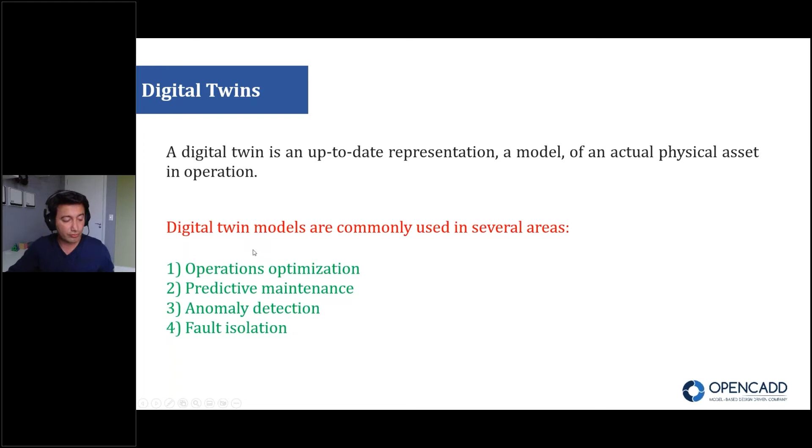First of all, I want to talk about digital twins. What is a digital twin? Actually, a digital twin is a model that represents the real system. We have a real system that is already working, and now this digital twin is a model that we created. But why should we do that? There are advantages to this.

Now we can focus on this presentation. It has 4 reasons, as you can see here. In the case of optimization, if we want to make any change in our system that is already working, it's too expensive to do any change directly. So we can have a model that we test, and if it really works, then we can implement it on the real system.

Another thing is predictive maintenance. It's a good option for us to have a productive instrument, and also to schedule a time for maintenance to have high performance devices.

And also another thing is anomaly detection. We know the real behavior of the system. If there is a deviation from the expected behavior, then we can realize it, and it can help us to change and have a quick action for that, since we know the expected behavior inside the system model. And at the end, fault isolation: if any fault occurs in our system, then we can quickly isolate it so as not to disturb other parts of the system.

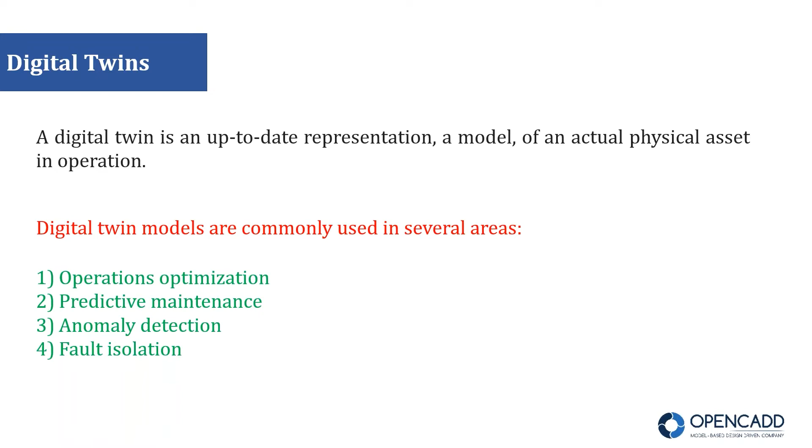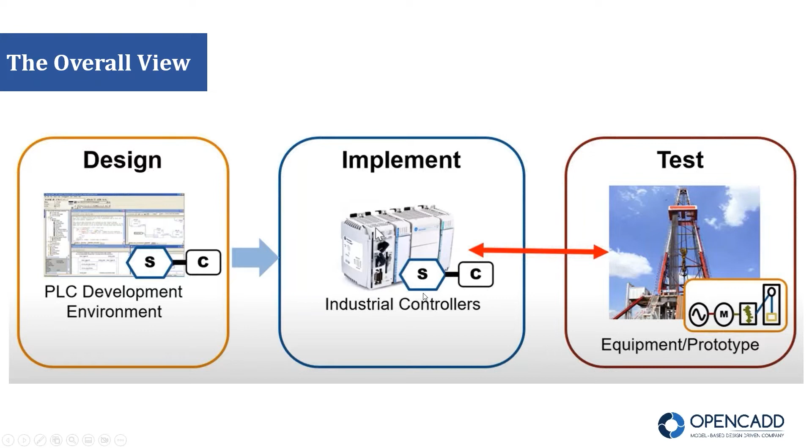Okay, now we know the importance of digital twin and modeling, so we are trying to create a model. I'll just show you how we can do it. We start with design. We create our design, and then we have this industrial controller. We can download it on this controller and see. And at the end, if everything is okay, then we implement it on the real system.

When we create our design, we can generate the C code, and then use a real-time instrument like Speedgoat, or we can generate the PLC code and download it onto our PLC. And at the end, if everything is okay, then we can implement it in the real system.

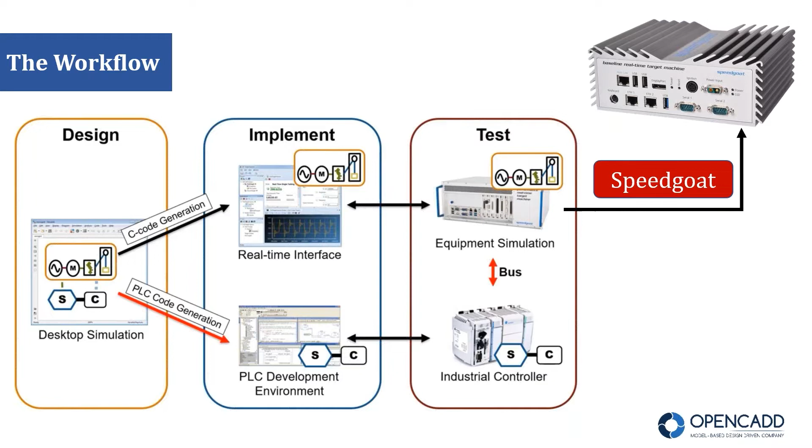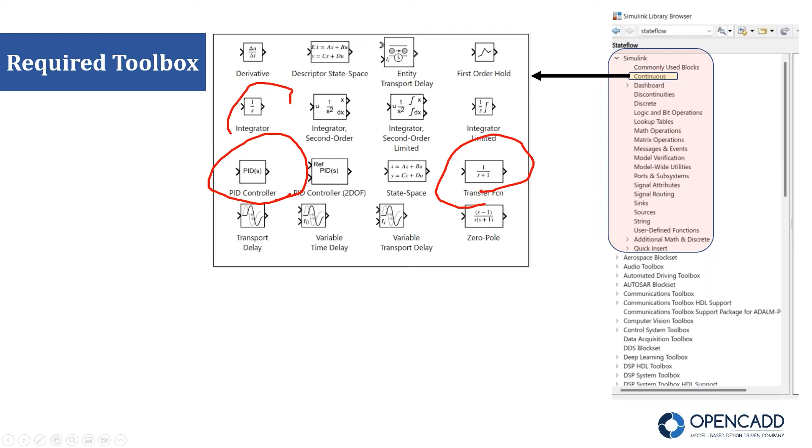For example, if you need the PID controller, we can find it here. The transfer function, you can find it here. Integrator—this part is too important for us.

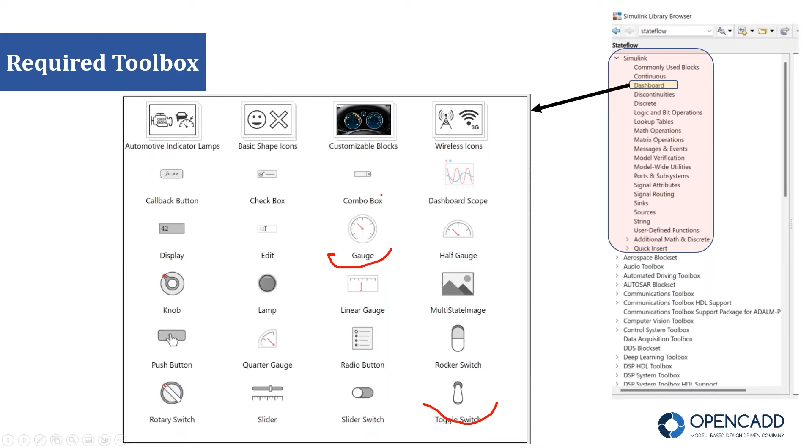And then if I want to mention, you can see the dashboard, for example the gauge or the toggle switch, some part that in this webinar I will use and show you how we can use in our model.

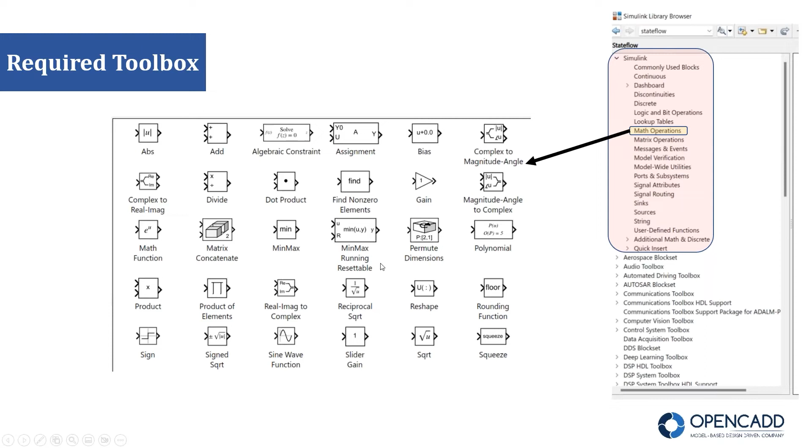And also we have a math operator. If you know about the mathematics behind your system, then you can use all of this mathematic part to create your equation also.

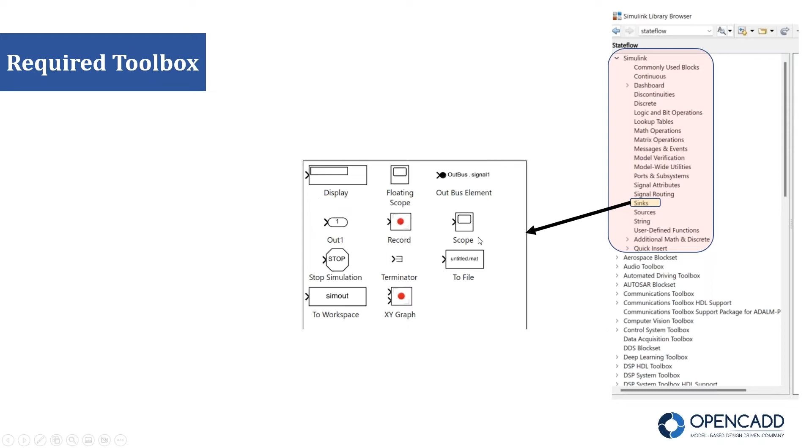And something else, for example the sink to show your result, to display as a scope. And also some sources that you can see here, for example the pulse generator that we have here, the sinus wave or other part, the clock that we normally use in our system, the ramp.

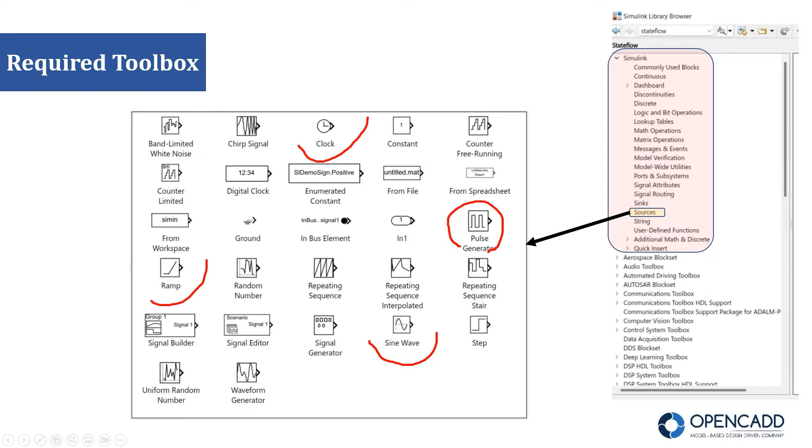So it's some basic requirements that we need.

In advanced models that we want to use, we should use Simscape. In Simscape, if you see, we have Simscape Electrical, Simscape Fluid, Multibody. So we need to know about this, and we really use this Simscape.

For example, Simscape Electrical, if you see, we have a passive model, we have some semiconductors like a diode, we have some sources, some machines that we can use, the circuit and switch, the breaker.

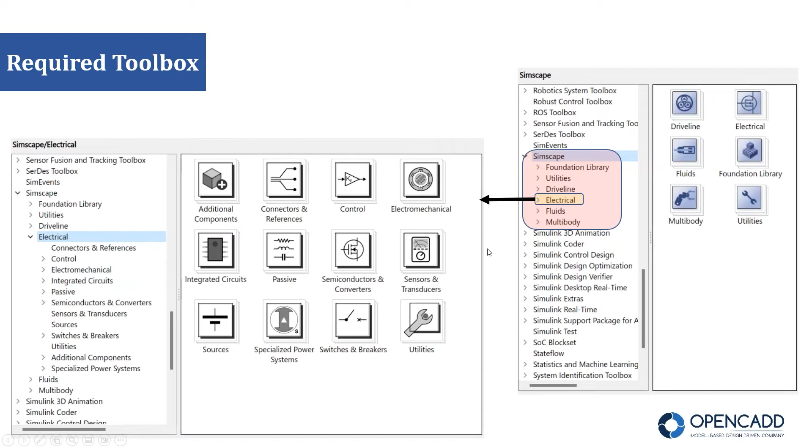And also the fluid part, that here as oil and gas we use too much in this case—gas, thermal liquid, also the actuator, valves, everything you can find here inside the fluid.

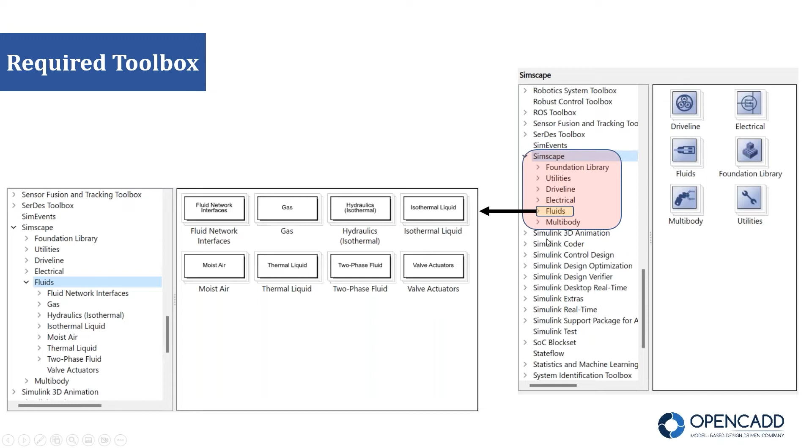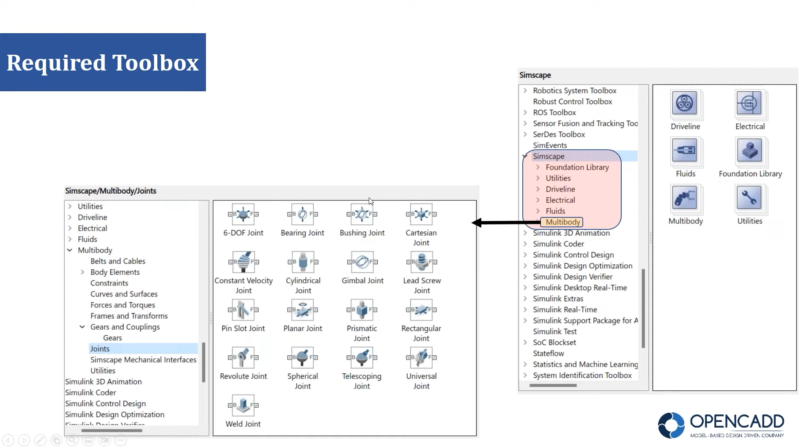And at the end, something that we use, multibody or mechanical, that you can see a lot of joints or gears or some parts that we use as a mechanical part. So that's it—it's a short review of something that we have in MATLAB.

As an example, if we open MATLAB and open Simulink, first I want to mention that MATLAB is something that you can use for something simple, for example some equation, some 2 + 2, something simple, and some sophisticated equation that we can solve with that.

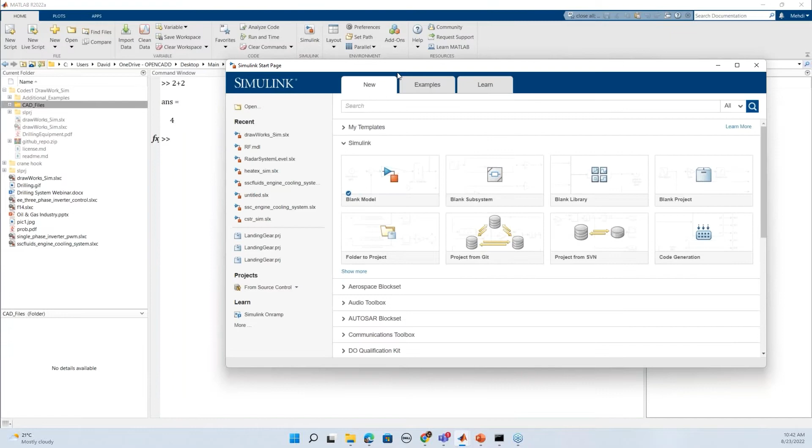Okay, if we open the Simulink, then we can see we have a blank model. Inside the blank model is nothing.

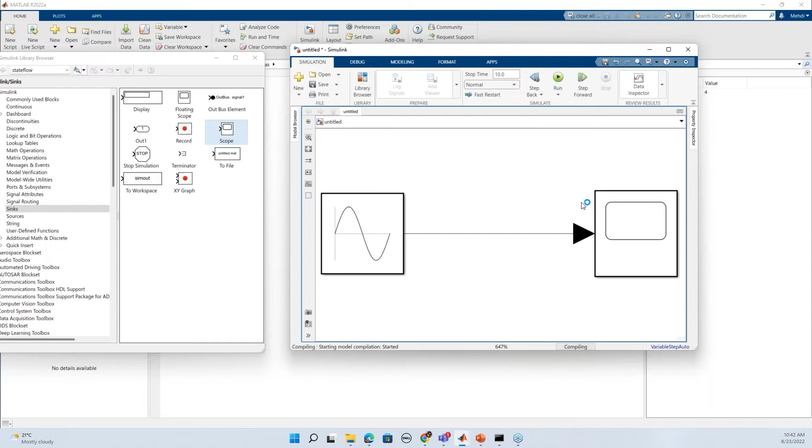You can just open the library, and then, for example, you can put one source like a sinus, and also one as a sink, as a scope, and then quickly connect to each other and easily see the result like this. Okay, and see the result easily.

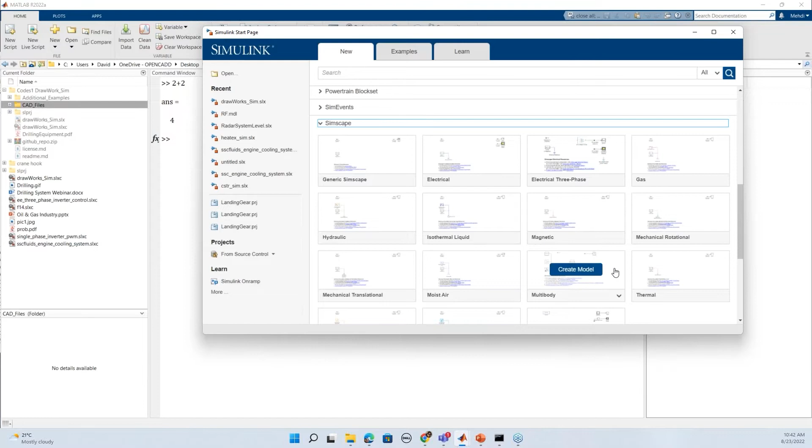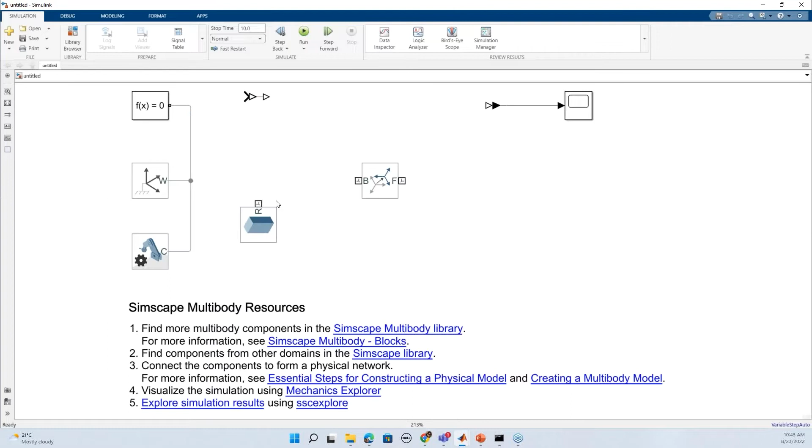You can find it. And in the advanced model, if you go to open Simulink and go to Simscape, here in Simscape you can see for each one we have one template. For example, for electrical, for multibody—if I open multibody, then you can see there is a template, the one I wrote. There is the template here, the minimum requirements that we have.

I just want to mention one simple model that helps us create the drilling part. As you see here, we have one box, and what I want is to create one model to move it up and down. Okay, so I have this box.

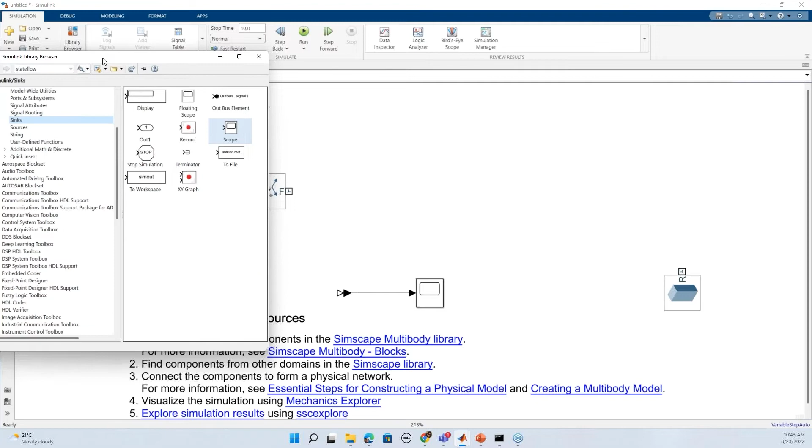Easily I can connect the parts to each other, the elements. I open the library, go to the Simscape part. If you find Simscape and Simscape Multibody, then something that I need here is one joint—a revolute joint.

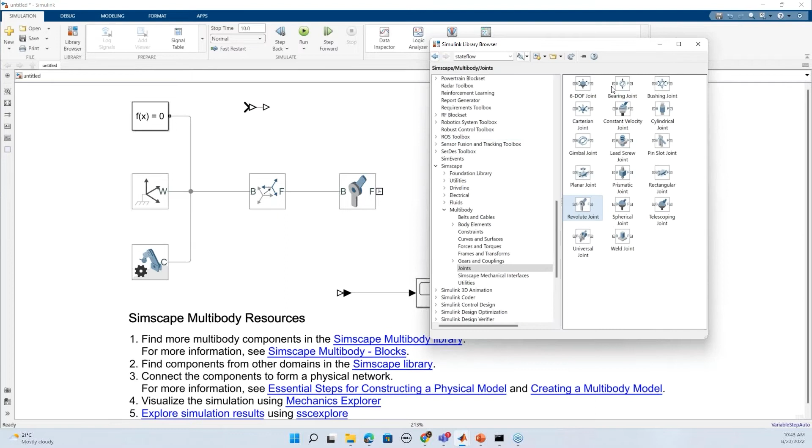I drag and drop easily here and connect to the other part, the initial part that I have, and then I select one cylindrical solid. What is this cylindrical solid? It's like a holder that I want to keep later and move up and down. Okay, so I put it here.

And then 1 meter is too much. I select 0.1 and apply, okay.

Then something that I need is belt and cable. If you see belt and cable, easily I can drag and drop this cable here, and also the end belt, and this configuration that I will put here. So easily I can connect the parts to each other.

Let me just turn it, and this one also. Okay, now everything is okay. Then just 10 is too much—I select 0.3. That's it.

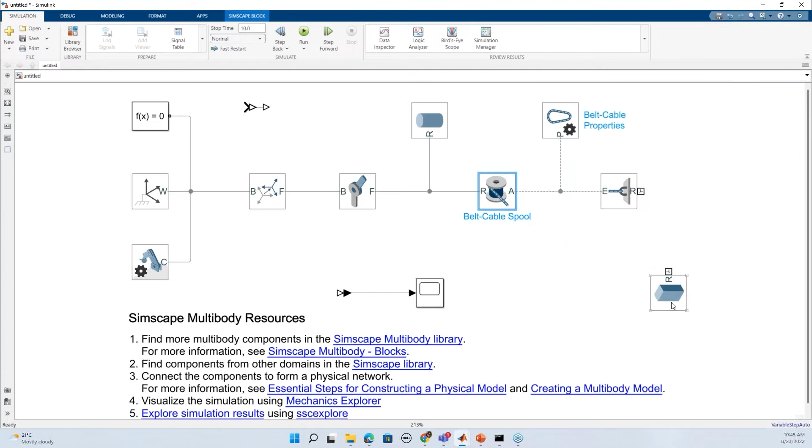Everything is okay, and I just want to run this system and see how it works. Just some requirements that we need—I put here, okay, and connect to the bed.

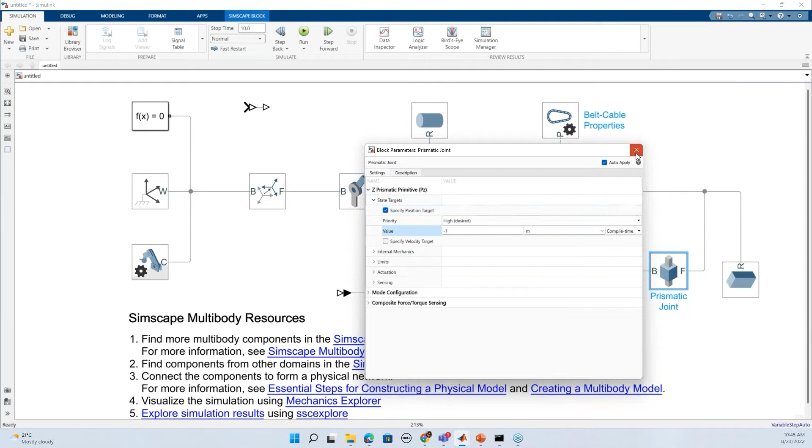And this position I put minus. Also, this axis I select the axis, standard axis, minus Y direction. It's something that I select, and everything is okay now.

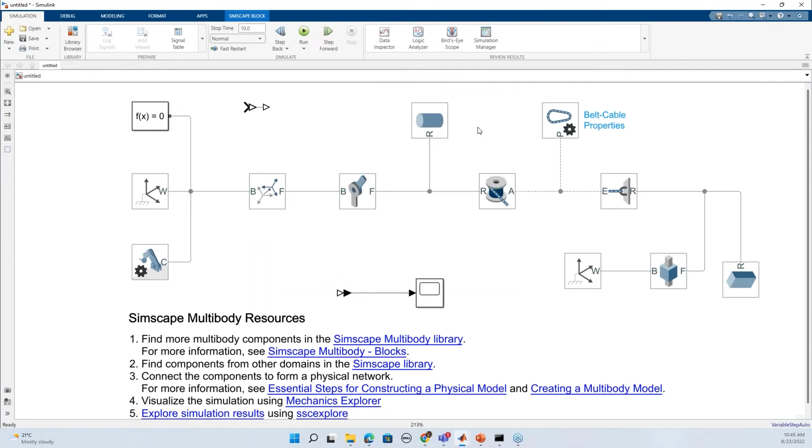Let's see, run the simple design that we create. I want to put this box up, move up and down, held by this cylindrical solid, and this cable does the actions. Let me see.

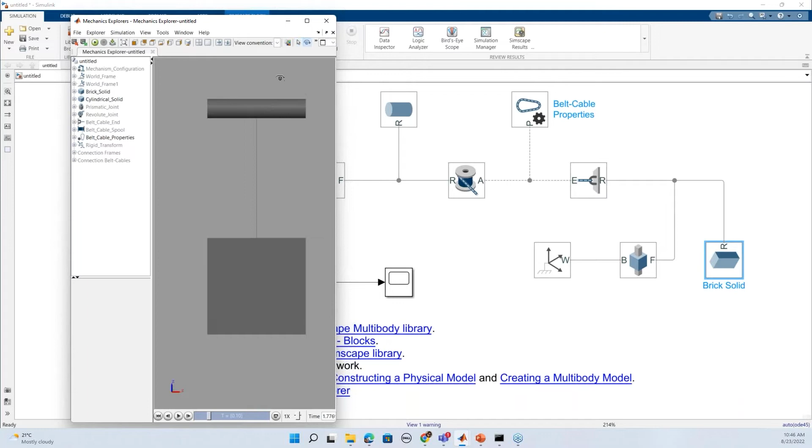Okay, before it goes down, I just zoom out and show you. If you see, we have exactly this holder that I showed you, and this box that wants to go up and down, and then just I zoom out, let it run to see all the parts.

Okay, so it's exactly the initial thing that we can use as drilling later. You can see easily we can create something that can go up and down.

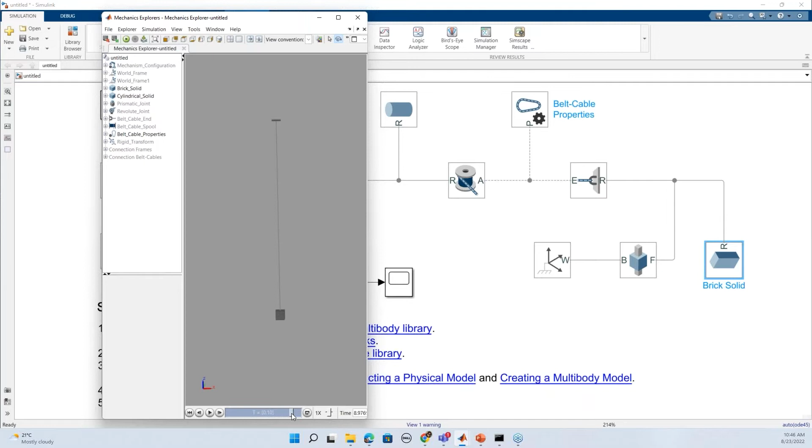It's one design model that we can use. A good option in MATLAB is that it has the ability to connect with other software.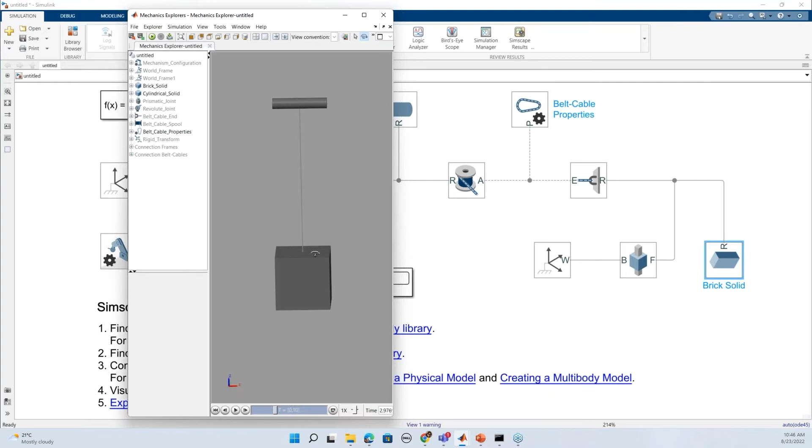For example, I create something in SolidWorks. Now I can import it here. I don't want this box, I want to create something else.

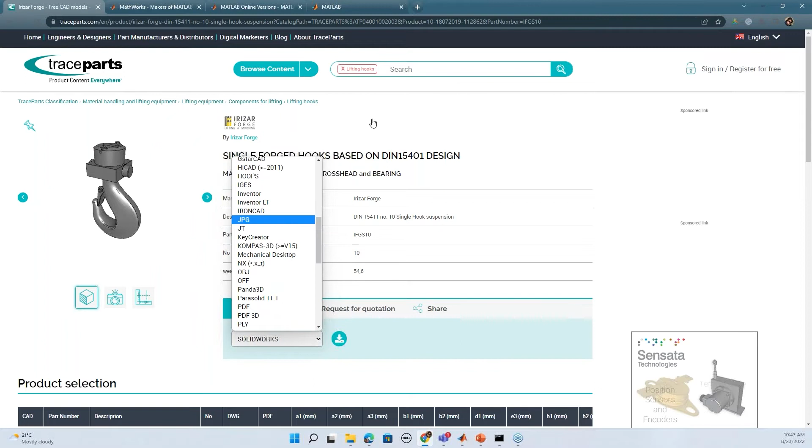I found one website where you can find models. For example, if you search crane hook and search, you can find a lot of crane hooks. I select one like this, and you can see a lot of formats available, for example CATIA, AutoCAD. I select the SolidWorks format.

You may want to create your own design. I just want to show how you can import SolidWorks and connect it with MATLAB. Easily you can download it, I downloaded it before, and I will import it here.

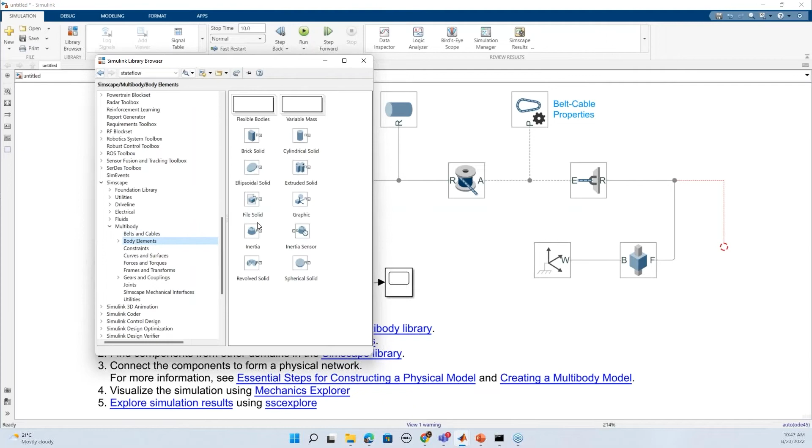If you see, I put one File Solid, and then some configuration. I select my file that I downloaded and put it here. It is exactly the model from SolidWorks that I imported in my Simulink.

Then I can give, for example, a mass like 100 kilograms to that. And in the case of direction, I should also put it because I selected -y here, I also select -y, then save it, apply, and run.

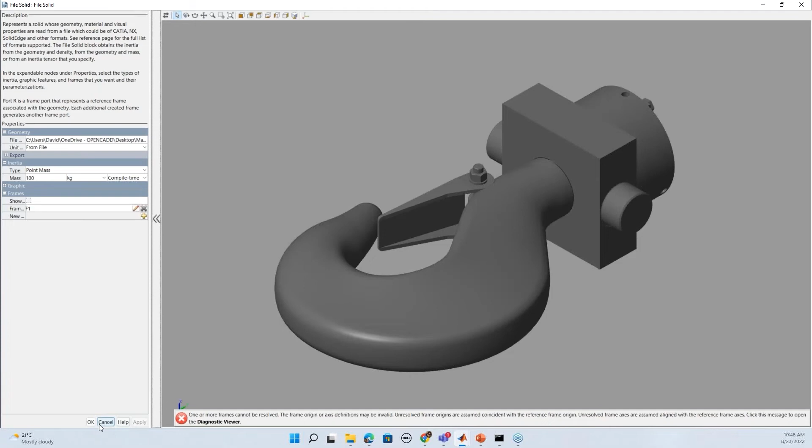So it's just connected to my design. Everything is okay, now I can run it. I will run this design and you will see, instead of that box, now I have my design from SolidWorks. It was from SolidWorks, now I imported it here.

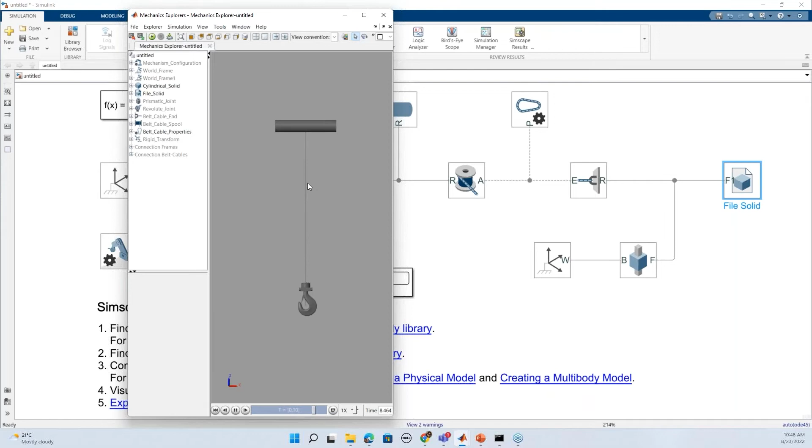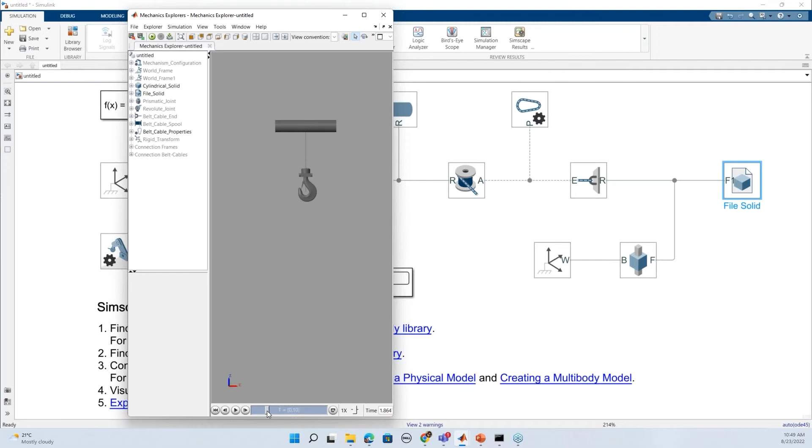It will be other parts that help guide me to the drilling part, drilling model, like this. You can turn it and see how it will be.

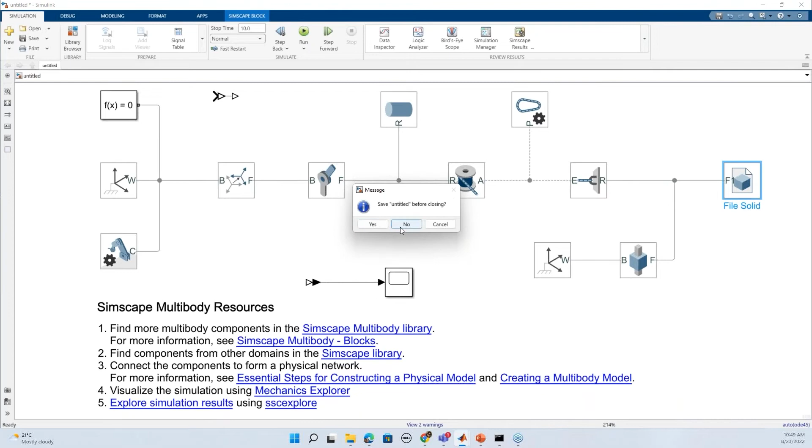Now that we know how we can create a simple model, I can go ahead and open my real model to show you how we can use Simulink.

That I put in a path, and that's it. I open my model, drilling model, something that we have. It will be the digital twin for my system. The structure would be like this.

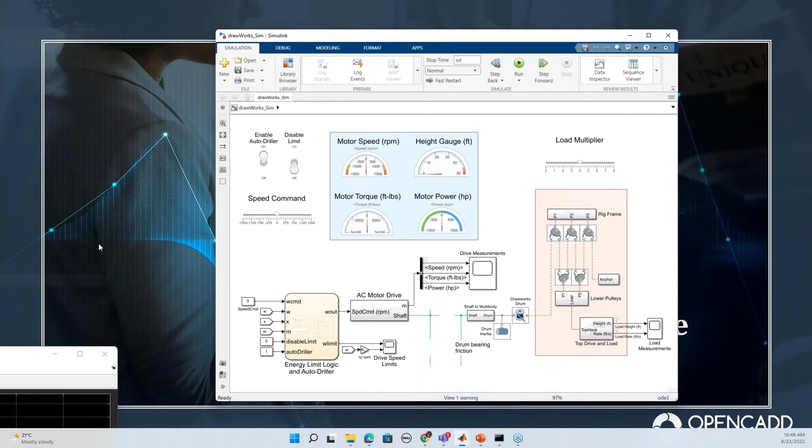Now we know the minimum requirement for that. If I want to explain about it, I can divide it into two parts. One part is the mechanical part, the belt, cable, all you can find here, and the other part is the software part where you can write the code.

If you just double click on it, you can see the Stateflow, the algorithm, all the parts you want. You can click and see the mathematics behind your model, and you can change any part.

For example, in the case of this cable that I mentioned, you can just right click on it, and it has great help. It can help introduce the belt cable and all the information you need about it, and even a lot of examples you can use.

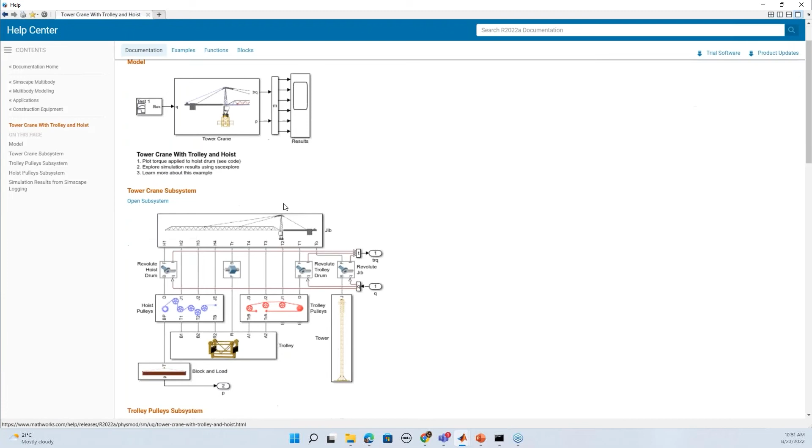For example, tower crane, you can open and see how we can use this belt.

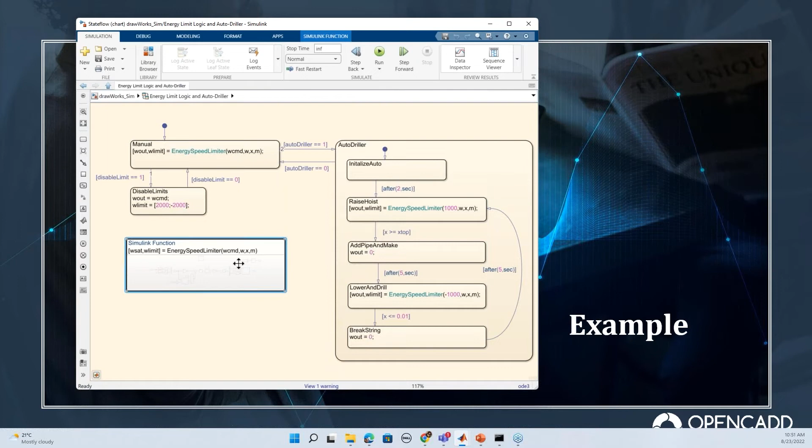Or another part, for example, you can go ahead and see the part where you can write code inside, this one, or the gauge, just right click and see the help and all the information. It's something you can use to become familiar with this structure, this element.

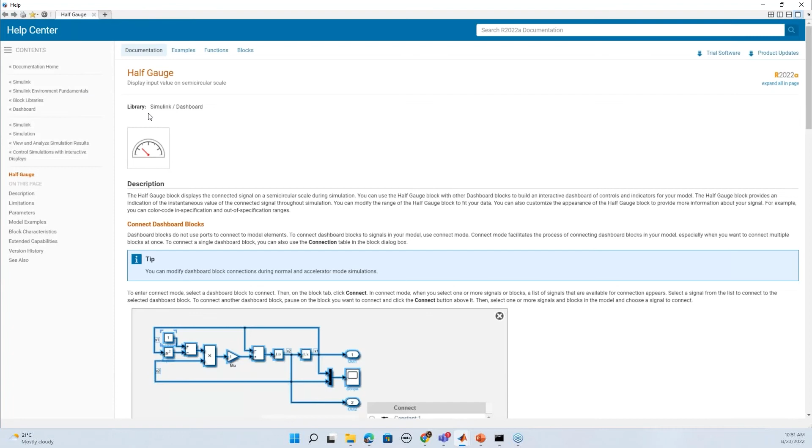There's also another part, the monitoring part that you can see. As I told you, you can right click and in help find this gauge, how it works, and maybe other examples about it.

Okay, now I run it. I want to run my model. Something I expect to see is the speed of the motor, the torque, the power of the engine, and if there is any change, how we can react.

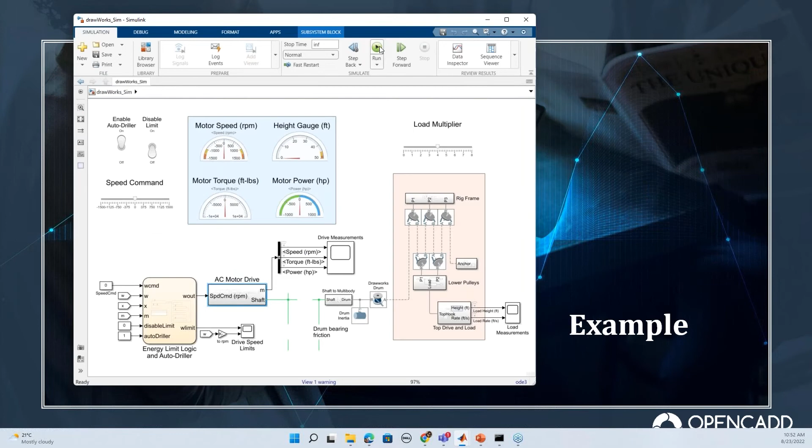We have the AC motor here, inside this block. Okay, let me run it. Compiling first, then I'll show you.

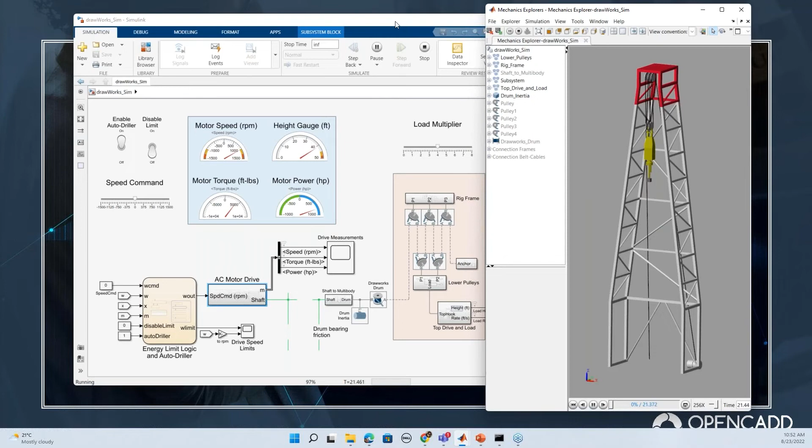It's the design that we created maybe on software like SolidWorks or other software. You can see we imported our design inside MATLAB, and now we can control it from our Simulink. For example, we can see the motor speed, how it can change.

What if I make any change? For example, here we have auto driller. I can turn off the auto driller and then see what will happen if I change, if I improve the load, or if I increase it.

You can see how the gauge can change the pressure on the motor, and then back to the normal auto driller that we can see here. Also, we can see the speed and torque of this motor.

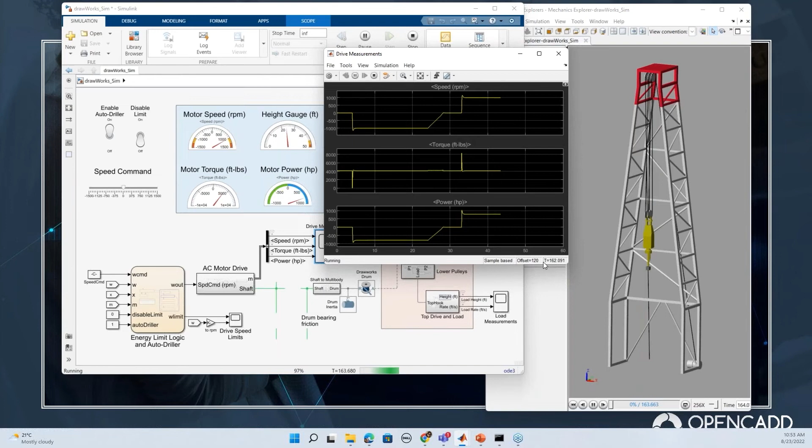What if we do any change inside our motor or our load? It can help us see the speed, the torque, the power, the minimum requirement. In the case of optimization, if you need to do any optimization, you can see here. Also, you can see the drive speed limit, something that you can find here.

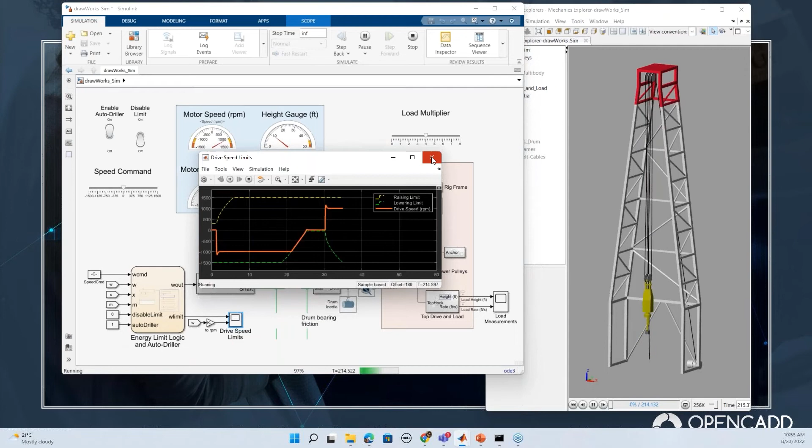And the load measurement also, you can see the behavior of the load measurement. So this model can help us as a digital twin, to see if we need to do any change, if we need to do any optimization, what we should do in this case.

So that's it. Let me see if there's anything else. We can also change the limit, change it and see the behavior, turn off, turn on, and see the reaction of the motor.

It's one design that we could create inside MATLAB and see the digital twin, how it can work. Now, if you have any question, I can answer, but let me stop it.

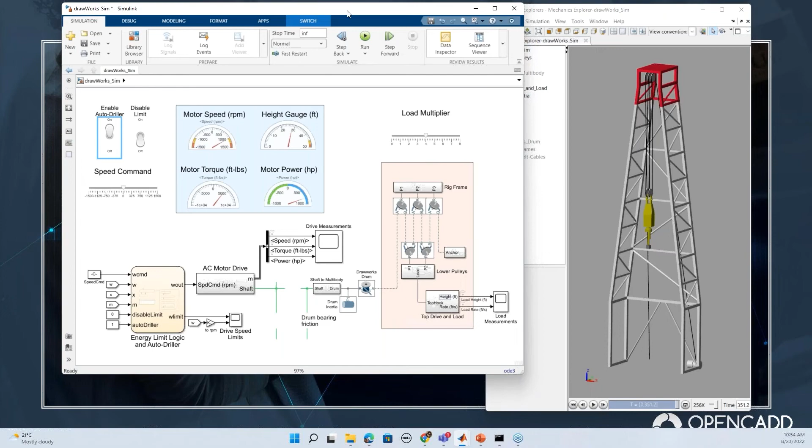Before I finish this modeling, let me show you the minimum requirement for this one. We need the Simulink toolbox, the Stateflow, the Simscape electrical, multibody, and utilities. It's all the toolboxes that we need inside our model.

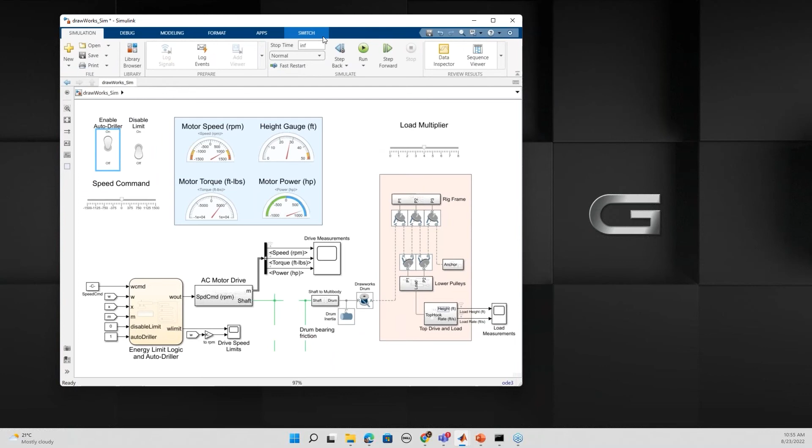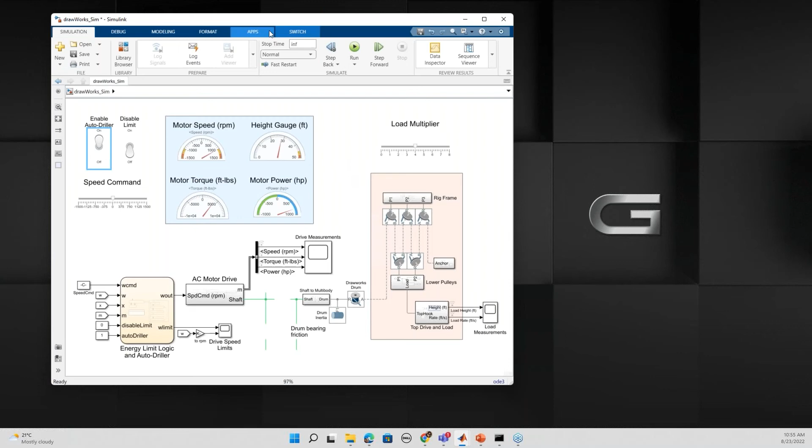And another advantage that I can mention in MATLAB: for example, imagine I create this app, and in my company I just have access to the MATLAB and license, but I want to give this app that I created, I want to let all the employees in my company see it. For example, what if I change something? What if I change anything and see the behavior?

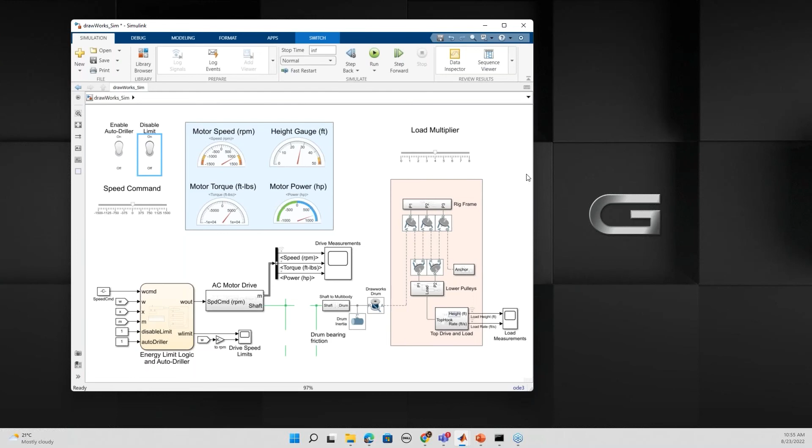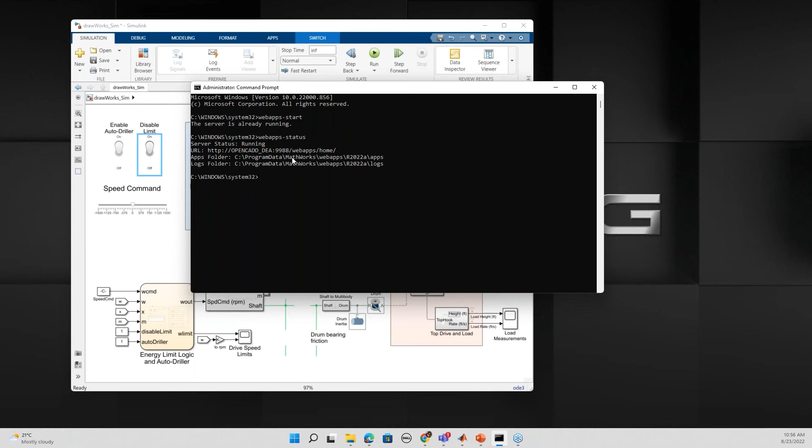Then we have something in MATLAB, another option, MATLAB Web App Server, where with one link like this, I created this design, and I could have one server on my computer. It gives me one link. I just give the link to the end user, and they just by URL on the browser can easily access what I created.

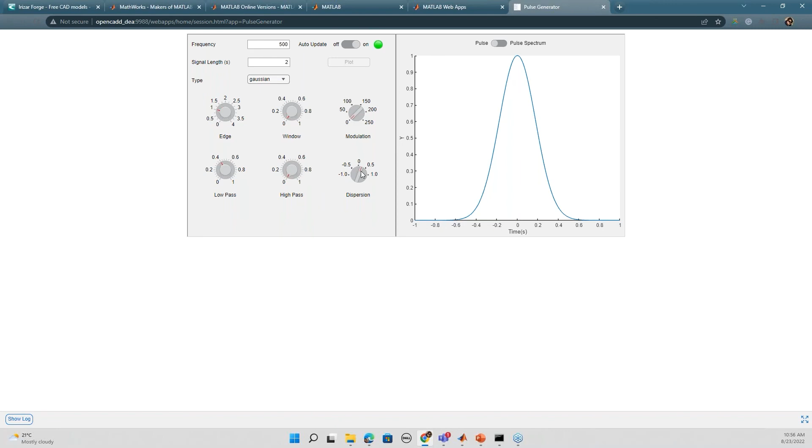For example, I created - now I have 4 apps here. The user just by browser, like Google Chrome, without installing MATLAB or any other software, can see how they can make a change inside this app and see the result. It's something that we can use inside MATLAB.

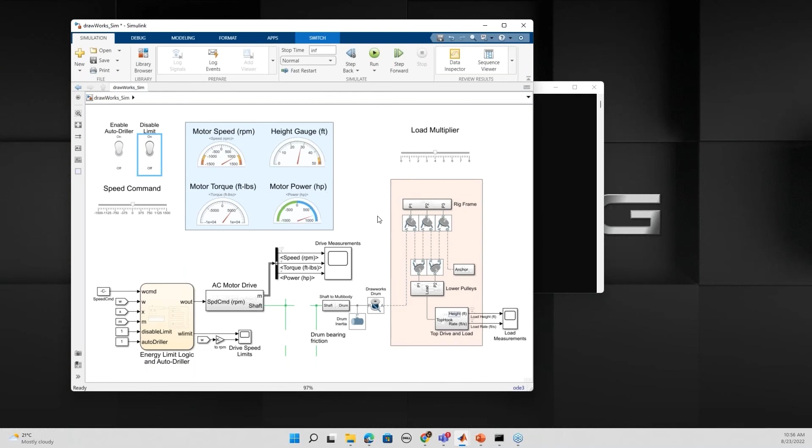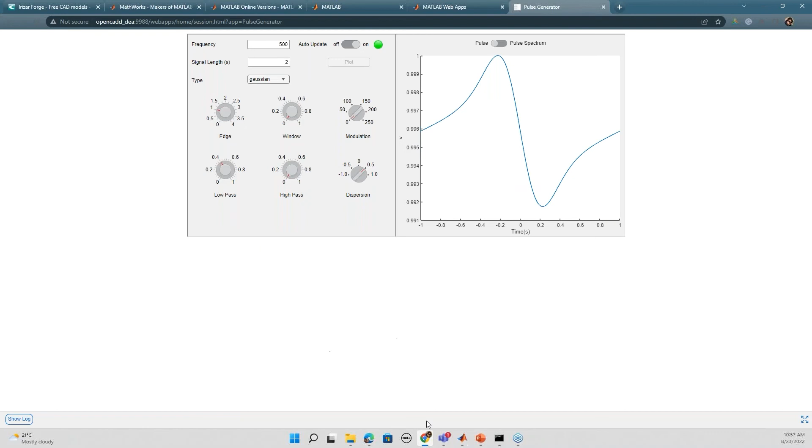We can just create the design and then create the app and put it on the server. That's it. And the last thing that I can mention is that for those who are watching this webinar, it's better to start with MATLAB Online.

Easily by creating a personal email, you can create one account and then see everything MATLAB, inside the MATLAB. All the things that I create, open the Simulink easily.

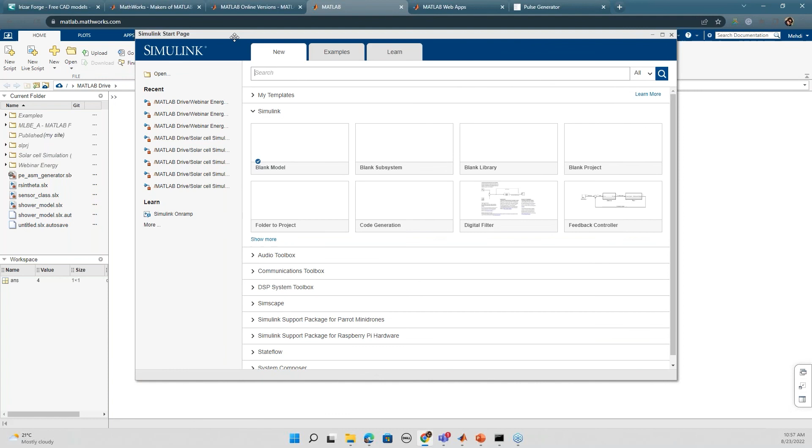Before accessing the trial version, I suggest this: you can easily open and see, create your model - exactly something that I did. You can do that in your system. It's online MATLAB, it's not my MATLAB, it's online MATLAB. And then go ahead to the next step of using a trial version.